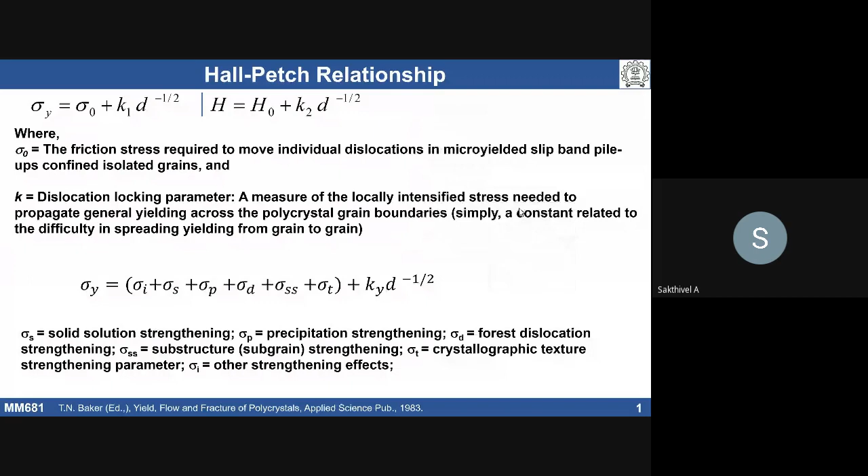Let me give some recap of the previous lecture and what we discussed. The complete discussion was related to the Hall-Petch relationship. I spent around 1.5 hours on the Hall-Petch relationship. There's a lot more story to talk about, but I have given some of the important aspects. It is a very interesting equation which was developed based on experimental findings.

Hall and Petch, two scientists, within a 2 year span of time, made observations on iron when it was deformed at different grain sizes, and they established how yield stress varies with grain size. The equation they arrived at from the experimental findings is that stress is proportional to the inverse of the square root of d. This governing equation was proposed by both Hall and Petch within a 2 year span, so that's why people call it the Hall-Petch relationship.

It's basically a governing equation which describes how the yield stress of a material depends on its grain size. Here sigma y is equal to sigma naught plus k d to the power of minus 1/2. Sigma naught and k are called Hall-Petch constants. Each one of them has its own physical meaning. Sigma naught considers the friction stress which is required to move individual dislocations from a micro-yielding slip band.

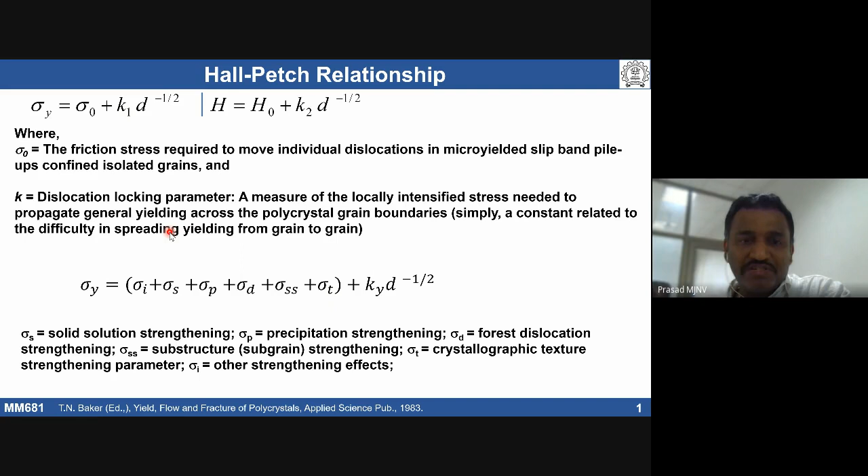All those things will be part of sigma naught, and k is called the dislocation locking parameter. It simply indicates the difficulty of spreading yielding from one grain to another in polycrystalline materials. That means the resistance offered by the boundary to dislocation motion. That is the dislocation locking parameter.

Then we discussed how the sigma naught and k values change depending on various factors. We considered four important things: crystal structure, stacking fault energy, testing temperature, and heat treatment, and how these dictate the sigma naught and k values.

Okay, so I think we had enough discussion about these variables which can influence Hall-Petch constants. Then I had showed that typically we do see linear variation if you make a plot of stress or hardness as a function of d to the power of minus 1/2. D is the grain size. It is supposed to give you a linear line.

However, in the last three decades, a huge amount of experimental work has gone into producing fine grain size materials. When people started producing fine grain size materials less than 1 micrometer, people reported deviations from the regular Hall-Petch behavior. The deviations can be a change in slope, meaning K can be changing, and the deviation can also be an inverse kind of behavior.

In regular Hall-Petch behavior, stress is inversely proportional to grain size: the finer the grain size, the higher the stress. In case of inverse Hall-Petch behavior, sigma y is directly proportional to d to the power of some slope. That means a grain boundary weakening mechanism contributes to this inverse Hall-Petch behavior in fine grained materials. This has been well established in various materials.

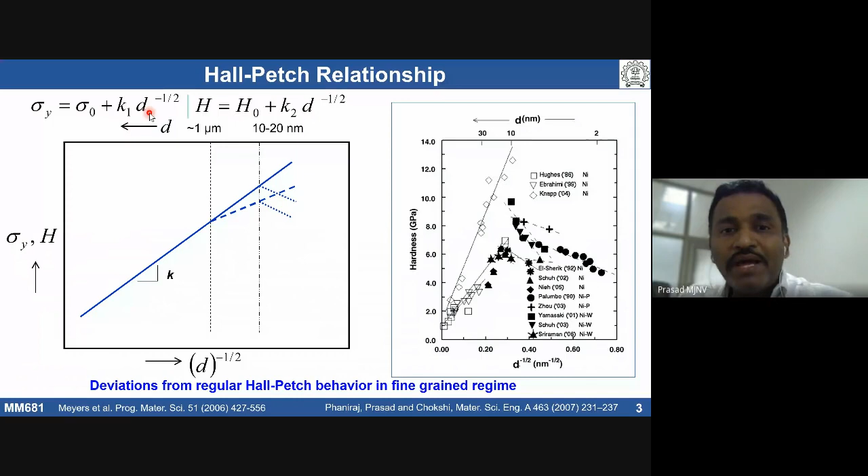Under pile-up theory, Hall and Petch and Cottrell considered that dislocations get piled up at the boundary. The dislocations can burst through after a certain amount of pile-up, or can also initiate yielding in the adjacent grain. The Frank-Read source can be initiated in the adjacent grain because of the stress developed.

According to Hall and Petch, dislocations can burst through the boundary. Whereas Cottrell said the stress that is building up can initiate a Frank-Read source in the adjacent grain, and then yielding can take place in the adjacent grain also. That's how people have discussed it in terms of pile-up theory.

The problem with the pile-up theory: the initial observations are all on steel. But when they did ultra microscopy, people did not find piling up of dislocations in materials like iron and aluminum, high stacking fault energy materials. Aluminum is a high stacking fault energy material, and BCC iron is also a relatively high stacking fault energy material. So people did not observe pile-ups.

That's why people ruled it out and said we cannot consider pile-up theory to be applicable to arrive at the equation which describes how the stress depends on grain size of a material. So later people came up with Li's theory and some other work hardening theories and composite models to explain how dislocations play a role in the grain size effect.

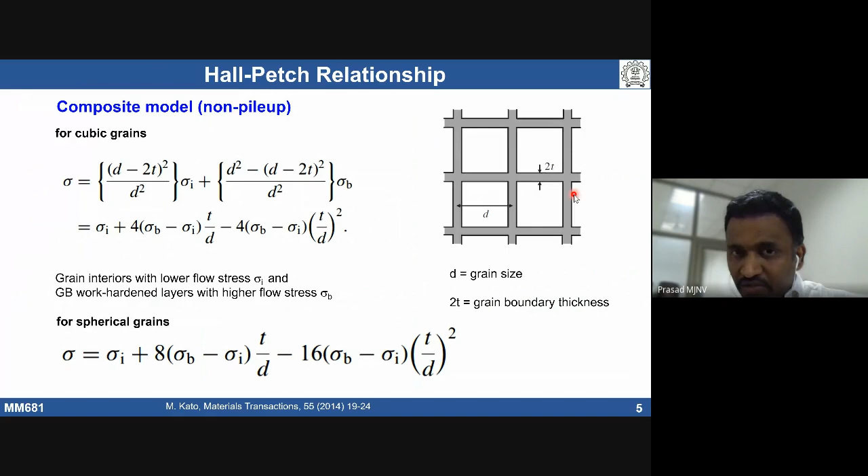Yield point phenomenon. This is one of the important aspects as far as the steel industry is concerned, and not only steel, the automotive industry also. The automotive industry uses a lot of steel, and most of that steel will be low carbon steels.

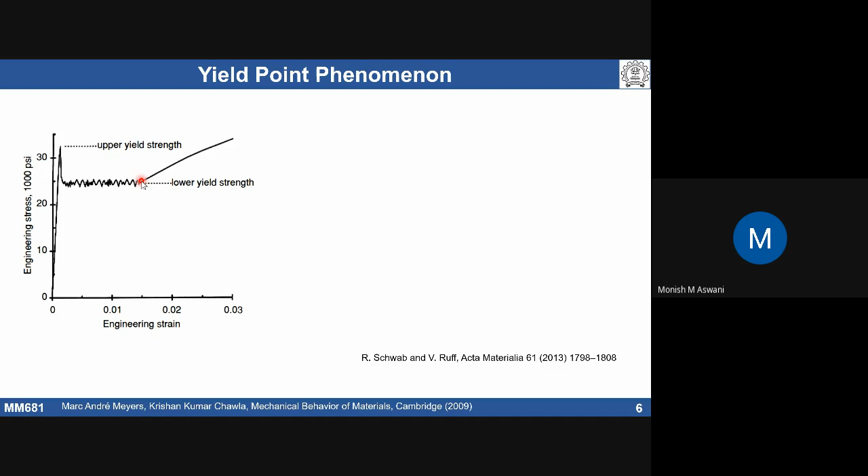Something like that, sir. I don't recall it completely. Okay, fine. I think both of you have given us some picture about this; it revolves around that. You used some of the terminologies: atmosphere, interaction with dislocations, interaction with solute atoms.

You have to remember that this yield point phenomenon is not only observed in steels but also in other materials. People have shown that cadmium, if it contains some interstitial atoms, can give you this behavior. The drop in yield stress has also been observed, though without such a significant constant stress region, in some ceramic compounds too, like lithium fluoride.

Steel is a very important material as far as fabrication is concerned, and we usually do fabrication in the plastic deformation region. If you want to make a component out of steel, many times the fabrication involves some amount of plastic deformation. So this kind of stress strain behavior is not good for fabrication.

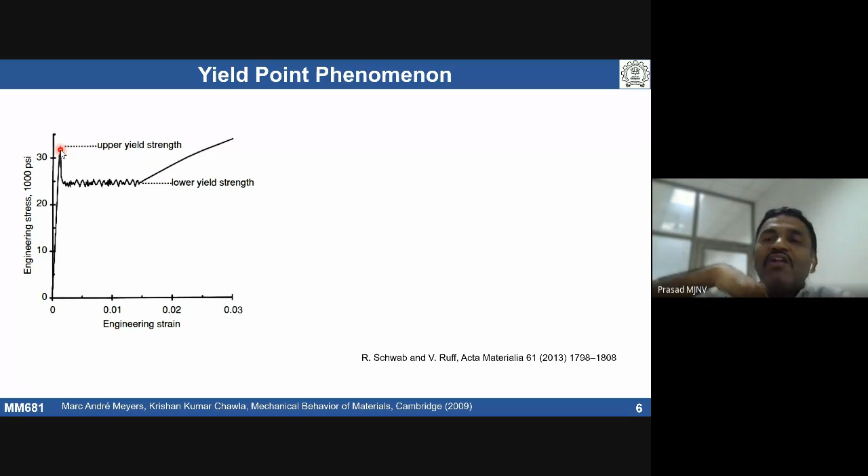That means the stress required for unlocking is higher than the stress required for moving the dislocations. So that is one of the reasons for the drop in stress. Is it clear? Locking and unlocking are two activities which contribute to the upper yield and lower yield in the material.

After that, once you unlock them, because you have solute atoms separately and mobile dislocations, they can move very freely. So that can lead to some instability in the deformation. We are going to see some unstable plastic deformation. What does unstable plastic deformation mean?

The solutes have their own interaction. Solutes are already within a grain and may have some velocity because of diffusion taking place due to temperature and strain rate. But the dislocation is also moving freely, very fast. So that can lead to a kind of unstable plastic deformation. This elongation is called yield point elongation.

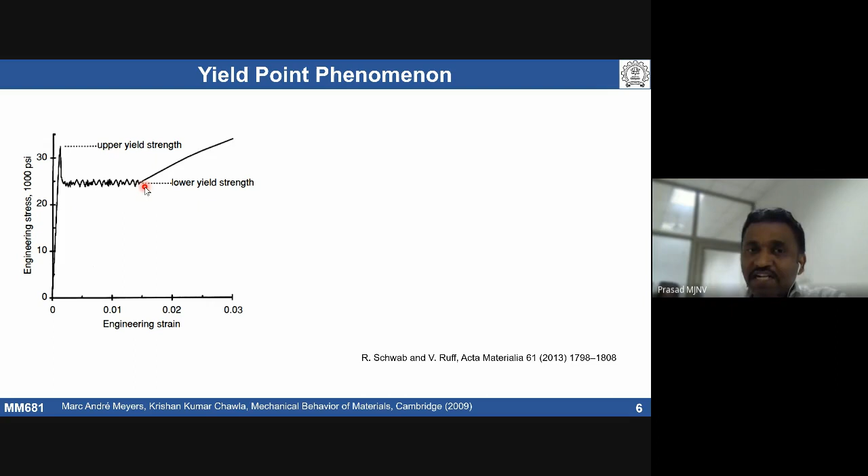After a certain amount of dislocation density has been developed, once more and more dislocations get built up, because we know that during deformation more and more dislocations can get generated and multiplied. Once a lot of multiplication happens, then we are going to see the regular plastic deformation behavior of a material.

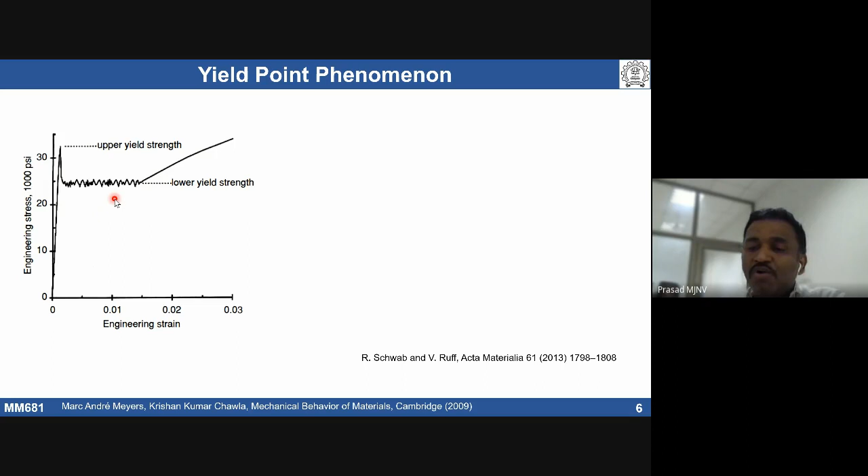During this yield point elongation, where we are talking about instability in deformation, it's one of the plastic deformation instability domains. This can lead to the formation of some bands. Those bands are called Lüders bands. If I take a stress strain curve, just these three regions 1, 2, 3, and a tensile specimen, we already know there is a drop in yield stress, which means the dislocations have been freed.

So when the stress drops to this level, the tensile specimen is going to see the formation of a band structure. This band is called a Lüders band. It will form around 45 degrees, between 45 to 70 degrees angle. Where is it going to form? Wherever the stress concentration region is present in a specimen.

In tensile specimens, the first stress concentration region is always the fillet region. The fillet region will have a stress concentration, so that's why we see the band formation there. Do not get confused: these bands have nothing to do with slip lines and slip bands. They are different from slip lines and slip bands. These are simply called Lüders bands.

These bands are going to form at a stress concentration region initially, and these bands will propagate from one position to another across the entire gauge length of the specimen. We are going to see propagation of this band.

In this band propagation, multiple bands can be generated. Depending on the stress concentration regions, we may see multiple bands or a single band. If the stress concentration is maximum at only one position, we may see only one band. If stress concentration is happening here and there, then bands are going to form from both sides.

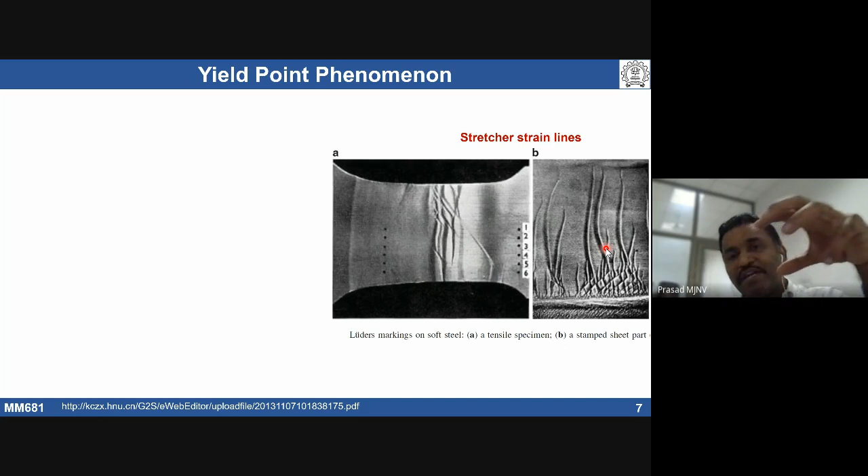One can see them macroscopically. If we use a well-polished sample, we can see the bands. With further deformation, those bands give rise to stretcher strain marks. If you take a sheet of low carbon steel and stamp it, that can give us these stretcher strain marks. The presence of these marks is basically the result of the yield point phenomenon. Whenever there is yield point elongation, it can give rise to these stretcher strains.

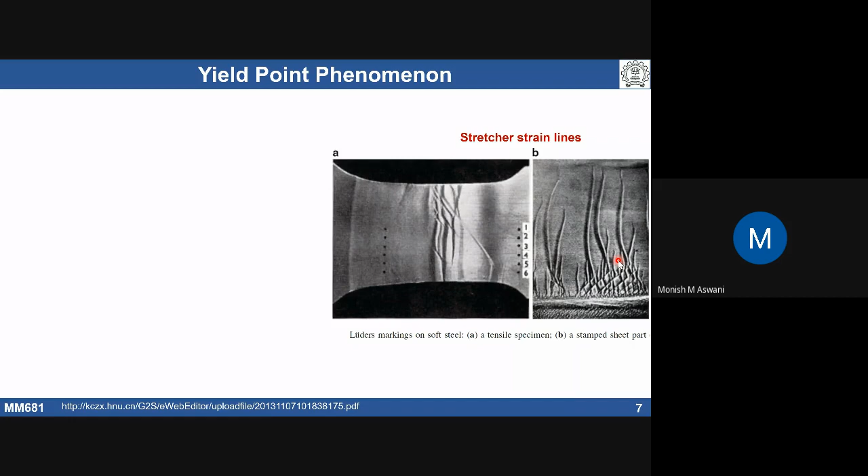So the formation of stretcher strains is considered a problem for a component fabricated without overcoming this issue. If we directly fabricate it, we see these bands. What is the problem here? Tell me. If stretcher strains are on a fabricated sheet component, what is the problem? Appearance, sir. Okay, so basically it generates local roughness in the material. Only appearance, anything else?

Is there any problem? Yes, you're right, appearance is the major problem because there's surface roughness. We usually want components with a smooth surface finish, but this gives us a rough surface. A rough surface is always a problem for components, especially for fatigue, deformation, and corrosion. Fatigue and corrosion are surface phenomena.

Fatigue usually happens at the surface. Crack initiation under cyclic loading starts at the surface of the material. Surface roughness gives easy crack initiation, then that crack can propagate in fewer cycles and the component can fail. Similarly, corrosion can be concentrated in the rough regions, so you see non-uniform corrosion. The smooth surface has less corrosion, whereas the rough surface has high corrosion. So these are the problems.

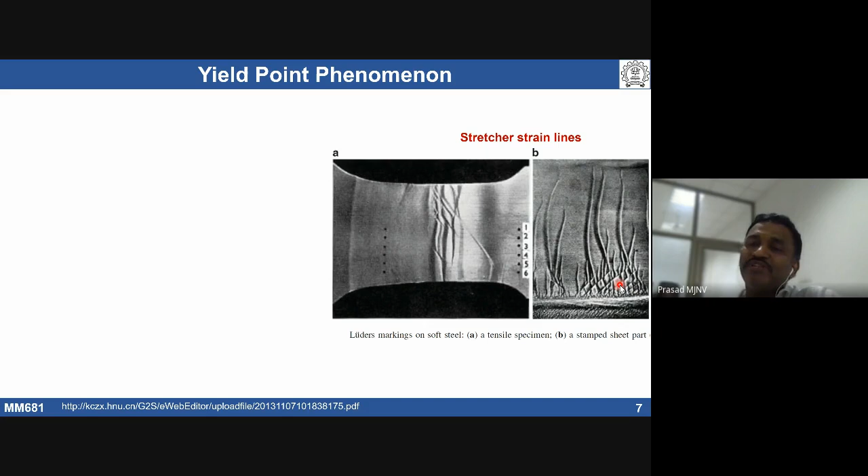If the material exhibits the yield point phenomenon, that can lead to stretcher strain lines in the material. This observation started way back in 1842, when people first reported the stress drop and the formation of serrations and these lines. Lüders was the one who, testing a well-polished sample, saw the formation of Lüders bands, a band forming and propagating. That was reported by Lüders in 1860.

The explanation of unlocking, locking, and Lüders band formation came about 100 years after the first report. Around 1949, Cottrell and Bilby gave the first explanation of why there is an upper yield point. The drop they could not explain properly; they said it falls. And why it actually undergoes such a deformation afterward, they could not explain.

But this is the kind of thing they used, the Cottrell atmosphere: the presence of solute atoms can interact with the dislocations and can lock the dislocation movement, and after that unlocking can take place. That's what was explained by Cottrell and Bilby.

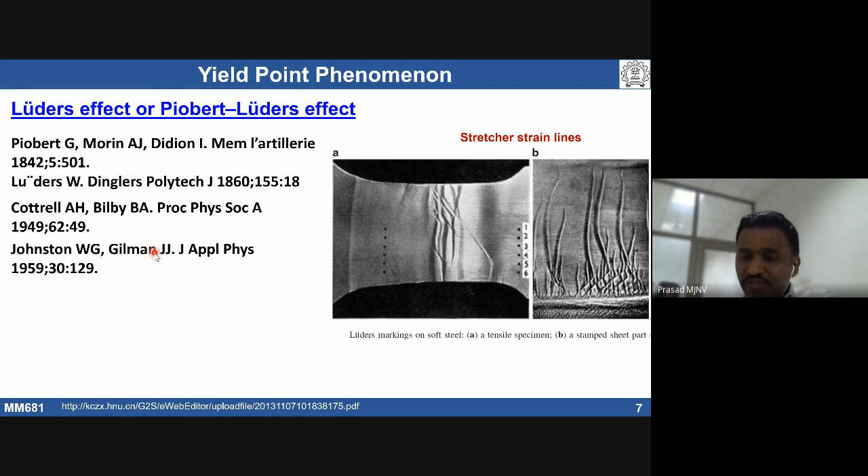So these two theories are being used to explain the formation of the yield point phenomenon in a material. A very interesting explanation was given by Johnston and Gilman, using a simple concept of dislocation movement, dislocation velocity. I'll come to that a little bit later.

So, Lüders bands in steel form at angles with the tensile axis of 45 degrees to 70 degrees. Sometimes we see single Lüders bands, multiple bands can also form, and complex bands also form. When complex bands form, that can lead to stretcher strains in a material. The plastic deformation observed is not simple. Though we consider it 45 degrees, it's not pure shear deformation.

It's a combination of shear deformation and deformation perpendicular to the Lüders band front. There are actually two modes of deformation: shear deformation along with deformation perpendicular to the Lüders band front, which both contribute to plastic deformation in the material when the Lüders band propagates from one location to another.

People have had difficulty explaining the temperature dependence of the yield point phenomenon and the level of the lower yield strength, how low it can go. We have observed there's a drop, but how low can it drop? People faced a lot of difficulties. I'll tell you, this research is not dead. It's still going on, to explain some of the yield points which are not explained using the Cottrell-Bilby or Johnston-Gilman models.

People are still trying, using advanced characterization tools, to observe again and explain the yield point phenomenon in materials. So far the common explanation is using the Cottrell-Bilby theory and the Johnston-Gilman model.

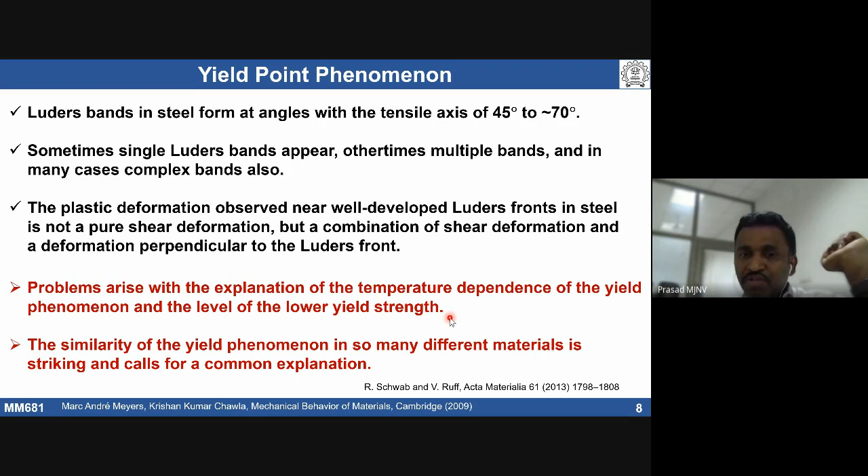According to the Johnston-Gilman theory, the necessary criteria are an increasing number of moving dislocations; the mobile dislocation density has to increase. That's one necessary criterion, and there should be a direct relation between the stress and the velocity of dislocations. In certain alloys, the presence of interstitial solutes is also a necessary criterion, but not in all materials. So the basic necessary criteria are these two.

So according to Johnston and Gilman, the yield point phenomenon can be observed when there is an increased number of moving dislocations, and there exists a relation between stress and dislocation velocity. This model says dislocation velocity is a function of stress and temperature. Velocity is proportional to sigma to the m, where m is some exponent, and temperature is considered here.

According to this model, they used the simple Orowan equation. In one of my previous lectures I said strain is proportional to rho b l. Here the strain rate is given with n, which I took from this paper; you can consider n equal to rho here. Rho is the dislocation density, b is the Burgers vector, v is the average dislocation velocity.

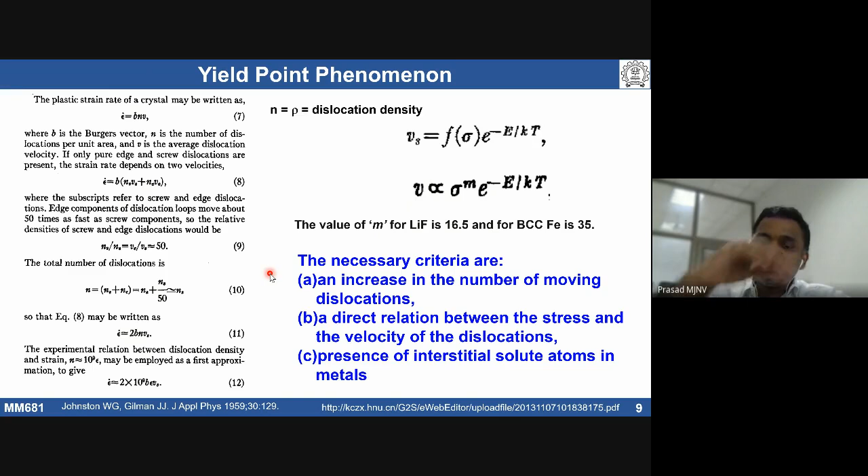Inside of the representative volume, your strain rate is increasing. Though I'm deforming material at a particular strain rate, my internal strain rate at a given representative volume is locally increasing, until maximum stress, up to the upper yield point. After that, the internal strain rate has to be maintained with the external strain rate. The balance has to happen.

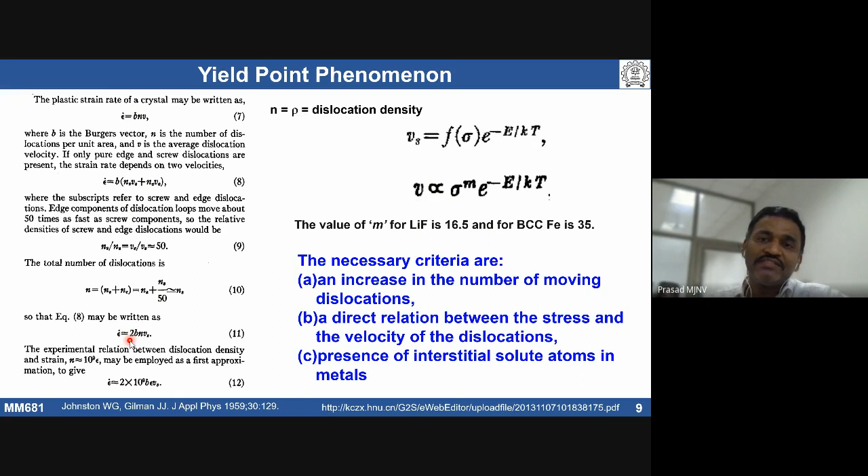That means what should happen? Your velocity of dislocation should come down, in order to decrease strain rate further. So initially, velocity is the internal strain rate, you're saying? Yeah. Velocity of a dislocation is a function of stress. With increasing stress, dislocation velocity is increasing. Am I right?

The dislocation velocity is directly going to influence the internal strain rate of the material. Though I'm applying a particular strain rate, initially a small amount of deformation can lead to an increased strain rate locally. So there is going to be an instability region. The external strain rate is fixed, but internal strain rate has gone up.

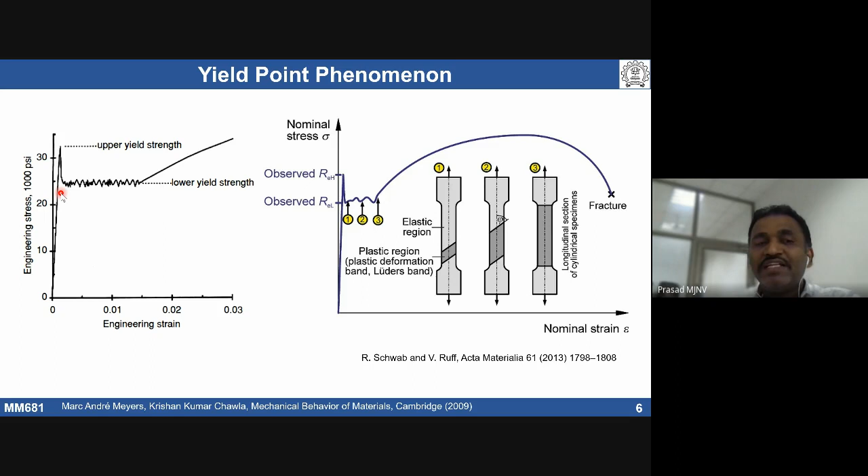In order to maintain a balance, the material has to deform at the same rate as the external rate. Your strain rate should come down to equal the strain rate you are applying externally. That drop can happen only by decreasing the velocity of a dislocation. This is how the drop taking place was explained by that equation.

This equation basically tells your velocity of dislocation is proportional to stress. Once it reaches the upper yield stress, the internal strain rate is higher. In order to maintain a balance between internal and external strain rate, this has to come down. But your dislocation density already increased a lot, so the increased dislocation density can bring down the velocity of a dislocation, if no solutes are there.

This maintains stability in the deformation, to deform the material at the same rate you are applying. If it does not, the material is going to fail miserably. If the rate of internal deformation is more than the external rate, we would see a lot of straining and the material can fail. But it will not fail. Since the material is not failing, what does it mean?

Your dislocation density has already increased locally, which can lead to a reduced velocity. We are going to see a lot of multiplication. All those things can bring down the velocity of a dislocation. That decrease in velocity gives you the drop in stress in the material.

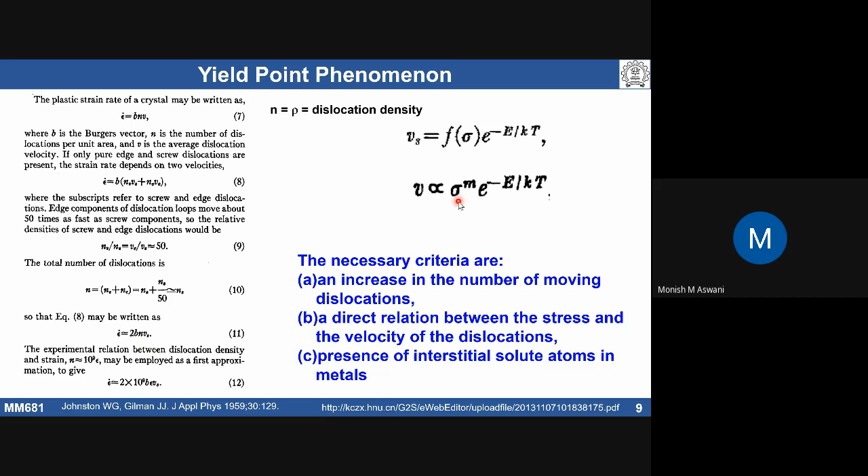Okay, this model does not consider any solute atoms. It can happen when a balance act happens between the internal strain rate and external strain rate; that can lead to a drop in the stress. Is it clear?

So if we talk about Cottrell theory, we are talking about carbon and nitrogen atoms, which are interstitial atoms, which can lock the dislocations. So how many solute atoms are required? What is the fraction of carbon atoms I need to pin a certain dislocation density? You are getting my point.

What is the carbon content? Why do you say only low carbon? Why not high carbon? And within low carbon, how much carbon content is responsible for such a yield drop in the material? How do you estimate how many carbon atoms, solute atoms, are required to pin the dislocations?

Any idea? Because we are talking about a low carbon steel. It has some carbon content. How many carbon atoms are going to participate in pinning the dislocations? That is going to depend on dislocation density. Am I right? Higher the dislocation density, one can expect higher carbon atom requirement for locking the dislocations. Because with higher dislocation density, I need more and more solute atoms to have a complete locking of the dislocations.

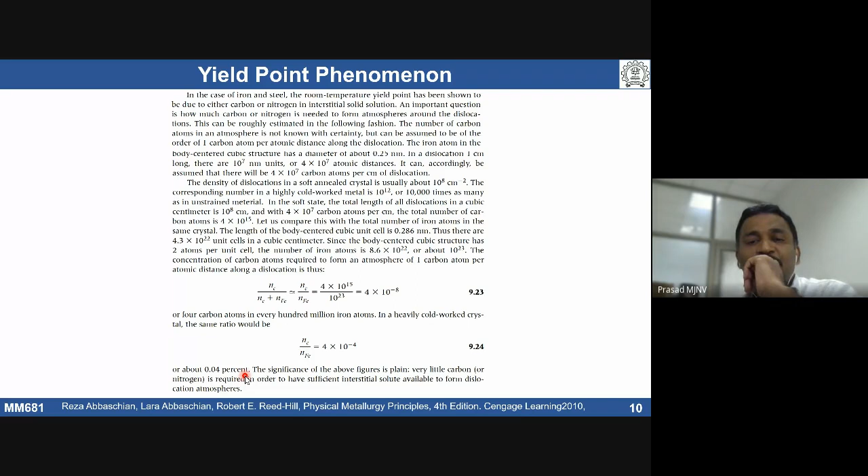Sir, so if there is no impurity, then that yield point phenomenon won't be seen? In steels, people did not see it in BCC iron. This presence is very much important, but I'll tell you, it is almost impossible to get pure iron by any regular production. That's why we always will have this much percent of carbon. Even if you go to extra low, ultra low carbon steels, we'll have at least 40 ppm carbon. So that's good enough.

So whatever low carbon steels you are producing, even of such low carbon, we do see this problem. If you get pure iron, Cottrell said we don't see such a difference. People did not report it either, because it's very difficult to get a ductile pure iron. People are producing it by different routes, but it's not ductile enough, because processing artifacts make it brittle. Is it clear?

So we need to have a small amount of carbon such that it can form a Cottrell atmosphere that can lock the dislocations. To unlock the dislocations, we need a high stress. Once unlocked, it requires low stress for the propagation, for the plastic deformation to take place. This is the concept given by Cottrell and Bilby. After that, Johnston gave a very nice explanation of why there should be a drop: instability in the strain rate of deformation within the material versus the external rate can lead to a drop in the stress.

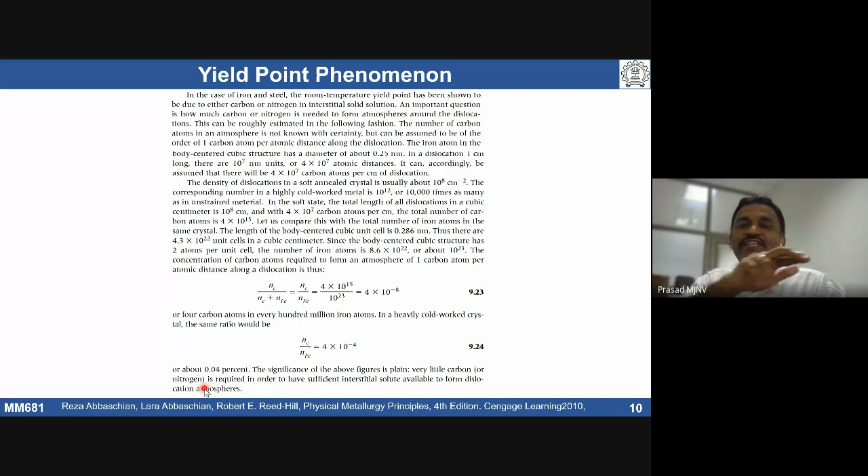So soon after annealing, before fabrication, one has to subject this material to a small amount of reduction. Typically, it comes around 1 to 2%. That's where we are seeing strain at a constant stress. That much strain you have to give so that we can follow the regular trajectory of the stress-strain curve of the material.

Because that strain depends on how much carbon you're talking about, how much dislocation density is there. Accordingly, one has to decide how much strain is required for the skin pass. Typically for low carbon steels, it lies anywhere between 1 to 2%. That's one of the solutions to control or minimize the stretcher strain bands.

The second method: in steels, the major culprit is the presence of these interstitial elements, which cause locking and unlocking that can lead to this kind of yield point phenomenon. If we can arrest those carbon atoms so that they will not directly interact with the dislocations, that means you need to arrest whatever carbon is there in low carbon steel. If you can arrest the free mobile carbon atoms, that can also solve the problem.

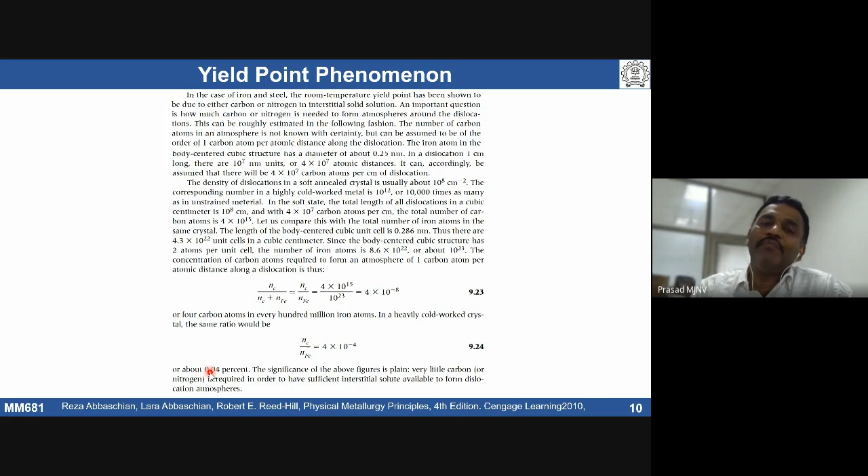So in that direction, people add some carbide forming elements like titanium, boron, aluminum. In the case of nitrogen, aluminum nitride forms. For carbon, titanium carbide, or with boron present, boron carbide, boron nitride. So those can avoid the formation of this yield point phenomenon in the material.

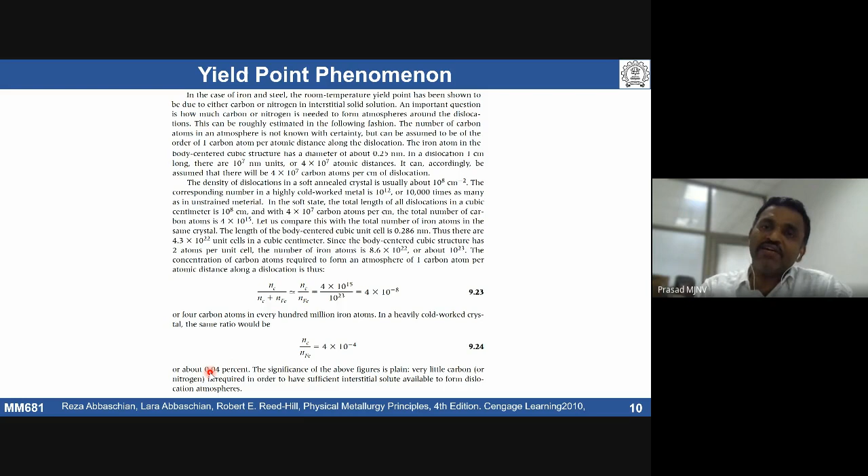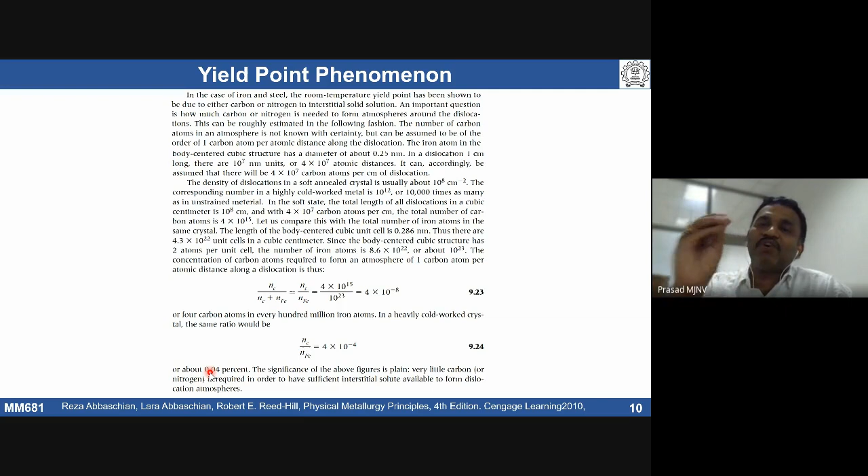These are two well-established techniques. One: if we do not add any titanium or boron, we should go for temper rolling, skin pass rolling. A small amount of reduction has to be given. The second one: you have to add carbide forming and nitride forming elements like titanium, boron, aluminum. Those can basically arrest the carbon by forming compounds.

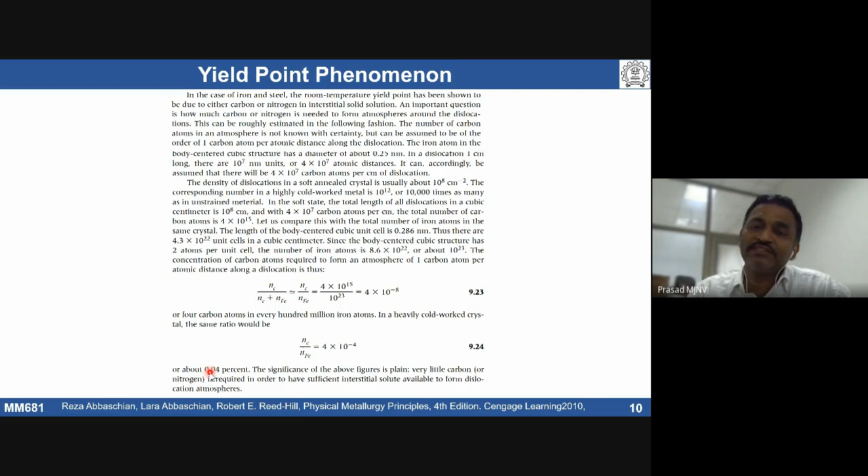Once the carbon reacts with these carbide forming or nitride forming elements, then we don't have any free carbon which can interact with the dislocations. That can also avoid the formation of the yield point phenomenon. Is it clear about the yield point phenomenon?

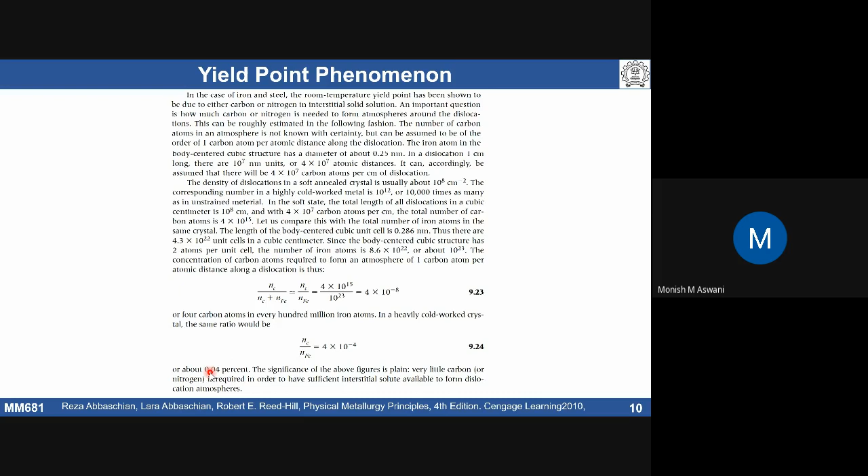When you deform material, when you give a small amount of deformation, it will form stretcher strains. But the stretcher strains forming can be multiple slip bands. Lüders bands will be forming, multiple very tiny ones. We are nucleating multiple bands so that the stretcher strain marks will be finer. The roughness is going to be much smoother.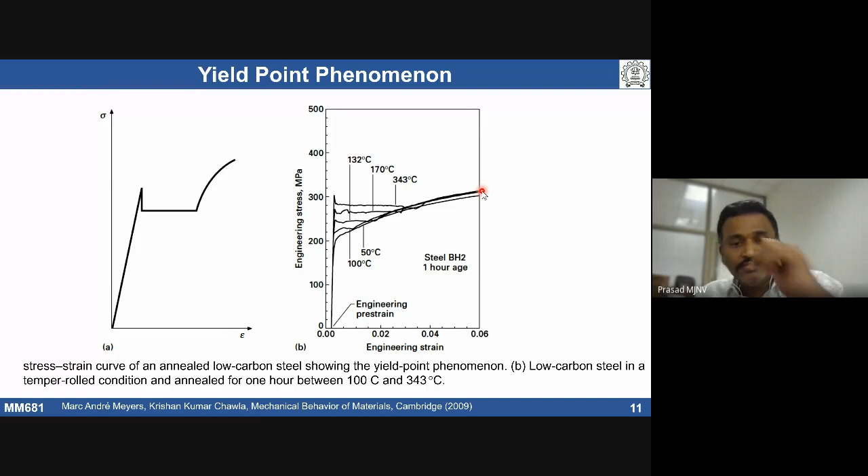Sir, if we use interstitial free steel, is it going to help? What is IF steel? Interstitial free steel. Yes, there we actually add titanium to control this. It forms titanium carbides. We are arresting the free carbon. There won't be any free carbon in that. That's why it's called interstitial free steel. Sir, then Lüders bands should not form? Actually, Lüders bands should not form in those IF steel materials. Okay, sir.

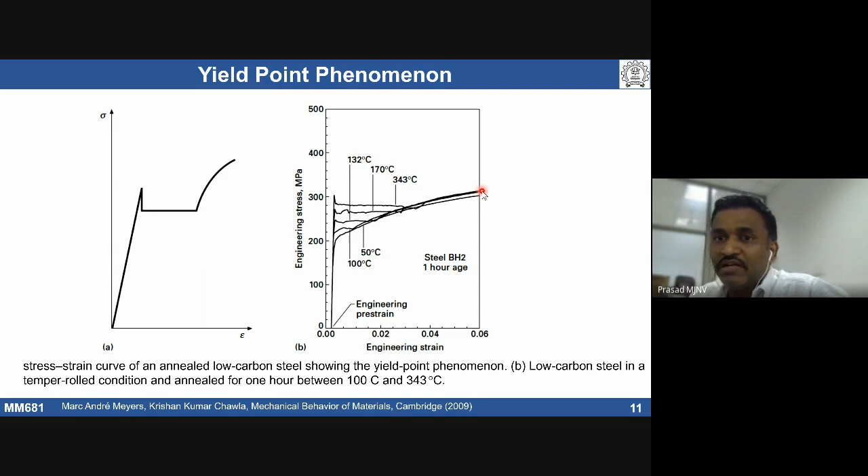Next lecture we'll discuss strain aging and dynamic strain aging aspects of the material during plastic deformation.